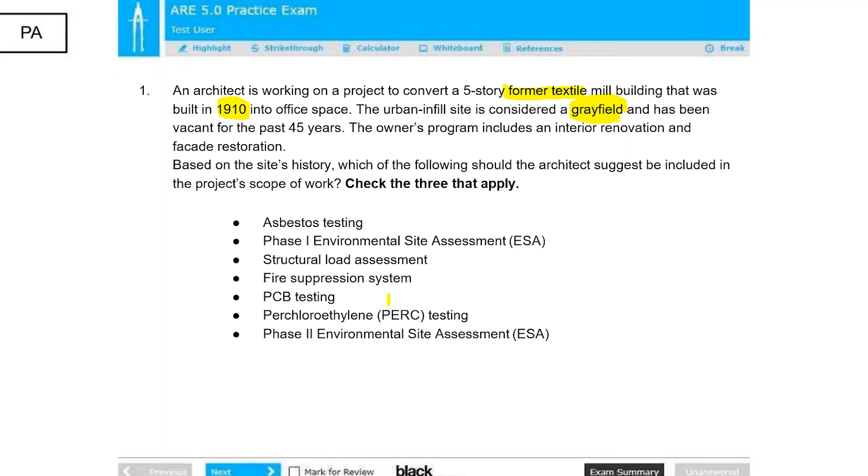So these are the answers that we would expect to have, and I'm going to go through each of them and explain why they are correct, and why the other ones are not. First of all, asbestos testing, that's correct.

That's something that should be recommended. The reason why that is relevant is because of the time frame: 1910. Asbestos has been used in construction for a long time at different levels, but in this case we're talking about 1910. Based on information from the EPA, asbestos-containing elements started to be banned around 1973. So anything before that is a suspect to have asbestos testing. In that respect, that is something that should be recommended.

Then let's go to the next one, phase 1 environmental site assessment. By definition, it's an assessment of the likelihood that a site is contaminated, done through visual observations, historical use reviews, regulations, or records. Given the fact that this is a former textile mill building, there may or may not have been elements that were contaminated, so phase 1 makes sense to first review the history of the site and determine whether there are possible contaminated elements.

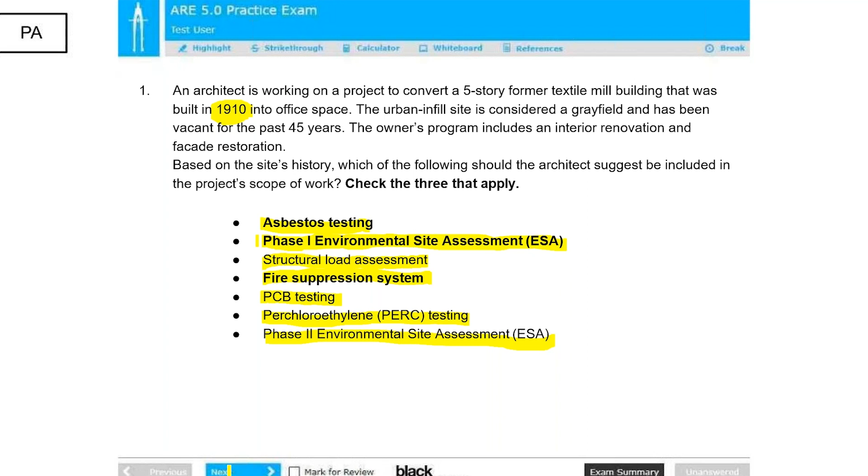Thanks for going through all those, Felipe. It's really important to know all of these terms when you're taking the PA exam. They can definitely come up on a question like this. And I think when people think of the ARE, they often think of questions about a brand new building, new construction, but I thought it was important with this question to remind everyone that questions about renovations show up a lot.

The last thing I'll say about this one is that, in terms of the procedure you go through, one of the reasons PCB testing and PERC testing are incorrect is that, aside from what Felipe said about them probably not being on this particular site, if that testing was going to be required, the phase 1 ESA would note that they think maybe these chemicals exist, and then the phase 2 environmental assessment would go further, do the testing, and confirm whether they exist and in what quantities. So it's important to understand the process that happens at the beginning of a project to figure out all the testing that has to be done.

All right, let's talk about stormwater management.

All right, second question. Again, kind of the same procedure. Think about certain keywords in the question that are relevant. I'm going to highlight them. An architect is working on the subdivision of a large meadowed plot of land that will be divided into multiple residential plots. The architect and civil engineer are working together to determine what kinds of systems should be utilized to mitigate the amount of stormwater runoff from the site onto adjacent sites. So it's purely a site-related question or scenario. There is no talk yet about actual building, so that is important to note here.

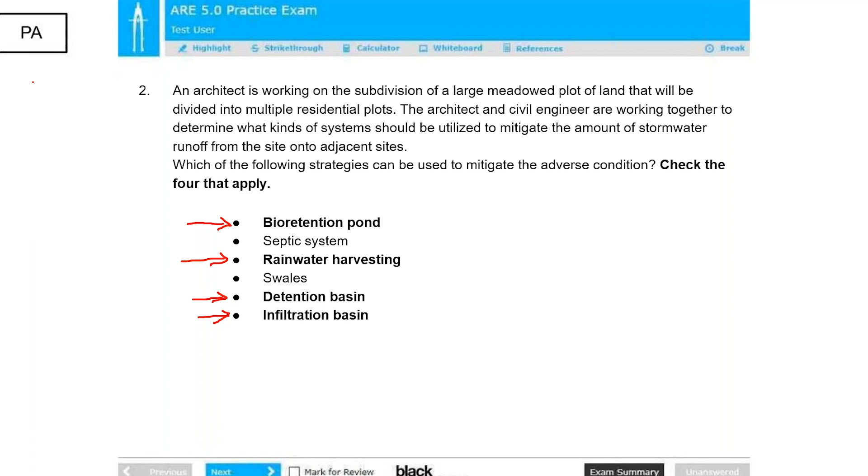So we are going to move on to PPD now and change it up a little bit. PPD questions about sustainability really differ from PA. In PA, we're analyzing what environmental or sustainability issues we need to solve for. In PPD, since we're starting to design the building, we address how, based on our findings in PA, we can address some of those things through design, orientation, and sizing of the systems. So with that, take it away, Felipe.

Okay, question number 3. Let's get our highlighter. An architect is working on the renovation of a 1950s home - always take note of the year where anything is mentioned, it may or may not be relevant - where the client is particularly interested in increasing the energy efficiency of the home. The blower door testing indicated air leakage at a rate of 15 ACH 50. After discussing with the client, the architect and client decide to include air sealing on the facade in the scope of work with the goal of achieving leakage rates at or below 3 ACH 50.

Given the air sealing that will occur, which of the following should the architect also include in the project scope of work? Right out of the gate, what we have to identify and understand is what information they're giving us, and understand what it means.

These terms essentially mean air changes per hour, that's what ACH means, at a rate of 50 pascals. So in this case, we're talking about 15 air changes per hour at 50 pascals versus 3 air changes. A lower number is more efficient because it's having less air exchange, making it more sustainable. So that's the premise, going from a very large number to one 5 times smaller, comparatively speaking.

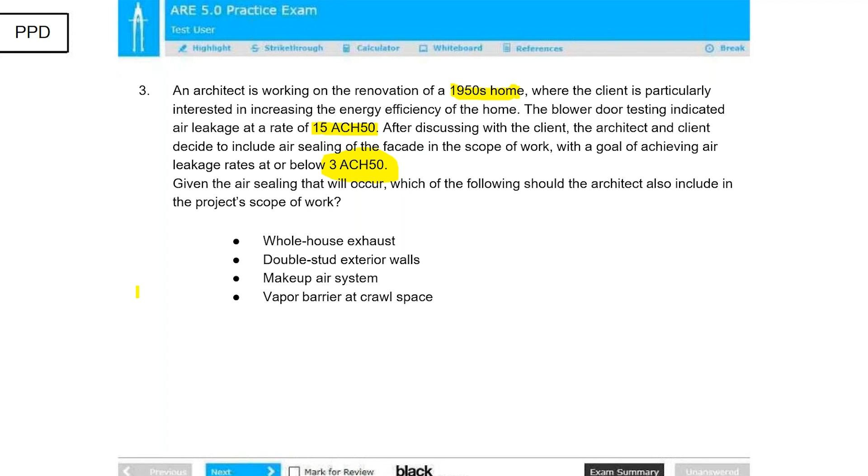So let's reveal the right answer. In this case, what we're looking for is makeup air system. We'll go through all of the answers again. Whole house exhaust is incorrect and would not solve the issue of a low air leakage rate, since we're trying to achieve a low air leakage rate. This is not necessarily going to help in that respect.

A double stud exterior wall, again, may help with the energy efficiency of the house, but not through air leakage necessarily. It may have a better R value, it may have other components, but air leakage is not necessarily one of them.

And makeup air system, that one is correct. We need to include air into the system to account for the lack of air exchange that we're going to have. Conceivably, there's going to be negative pressure in this house if there's no air coming into it. This could turn into issues where the doors may not be able to be opened as easily, or all sorts of interior air pressure issues.

And vapor barrier crawl space, this one is not going to address the issue. So again, at this point, the makeup air system is what should be understood as the answer.

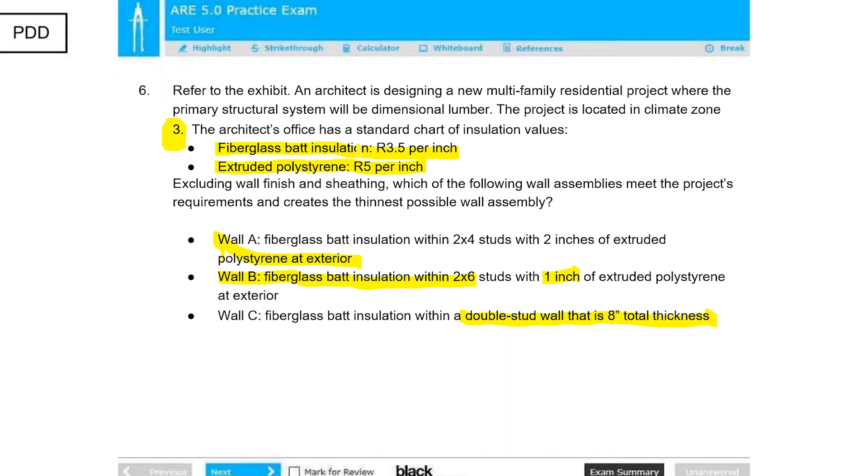All right, so given this, let's review what exhibits are given. Remember, we talked about zone 3, and then it's going to be a wood stud construction.

One of the important key elements is to identify and be able to navigate this chart. First of all, we are here, climate zone 3. We're here in group R, and then we're gonna go all the way down to where it says wood frame and other. These are the target values for this example. By the way, this is taken from the code from ICC, and it's applicable—each jurisdiction will have their own version of a chart like this.

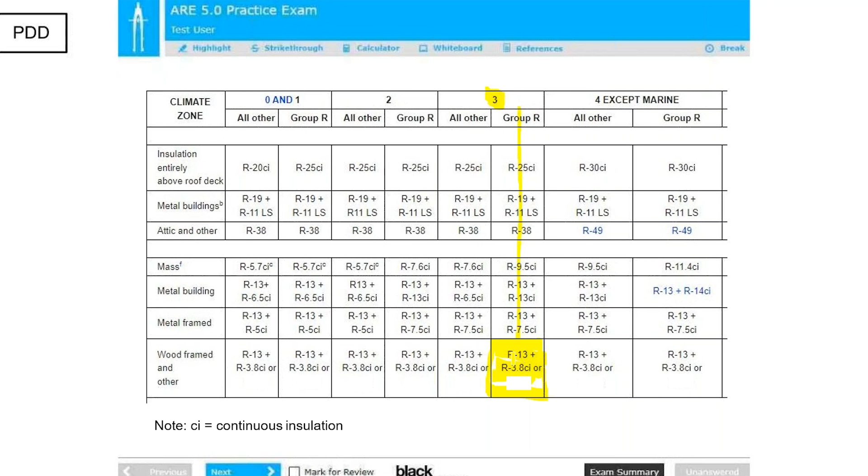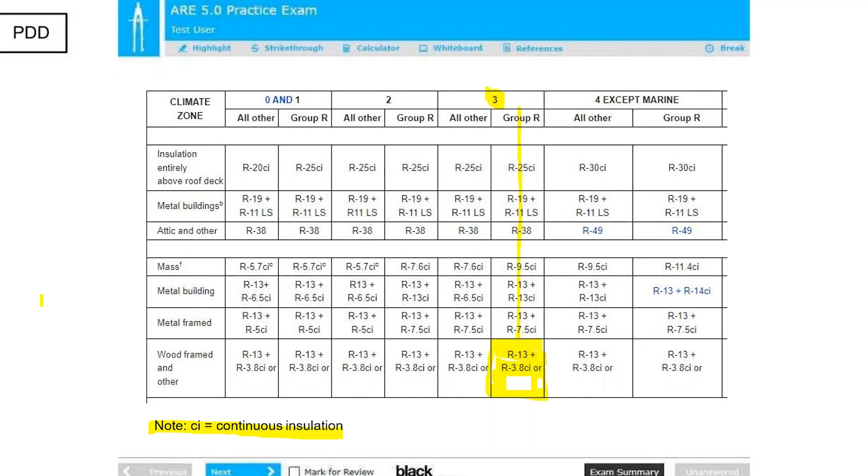So R13 plus R3.8 CI—always important to understand continuous insulation—or alternatively, a wall construction that is R20. So right out of the bat, there are options to achieve this criteria, and it's all based on a prescriptive method. There may be alternative ways to achieve what the code requires, but in this particular case we're talking about a prescriptive method. So let's go and evaluate what it's given.

So we talked about wall A. It's a nominal 2x4, but the actual dimension of the studs is 3.5. That's going to give us the amount of insulation that will fit within the cavity, at a rate of 3.5 per inch, giving us a total of 12.25. Now, if we go back to our requirement, we need R13 plus R3.8 continuous insulation. In this particular case, because this wall does not meet that criteria—this is less than 13—that wall is not acceptable.

Somebody could argue, okay, it's R12.25 plus 2 inches of R5 per inch, which is 10. That's a total of 22, which is larger than R20. However, the math of how these R values are calculated is not one-to-one. The thought process is that when you have a cavity insulation, you're still not insulating 100% of the cavity—there are studs interrupting that insulation, so that has to be accounted for. That's why they give you the option of R13 plus R3.8 continuous insulation, or R20. So that's an important distinction.

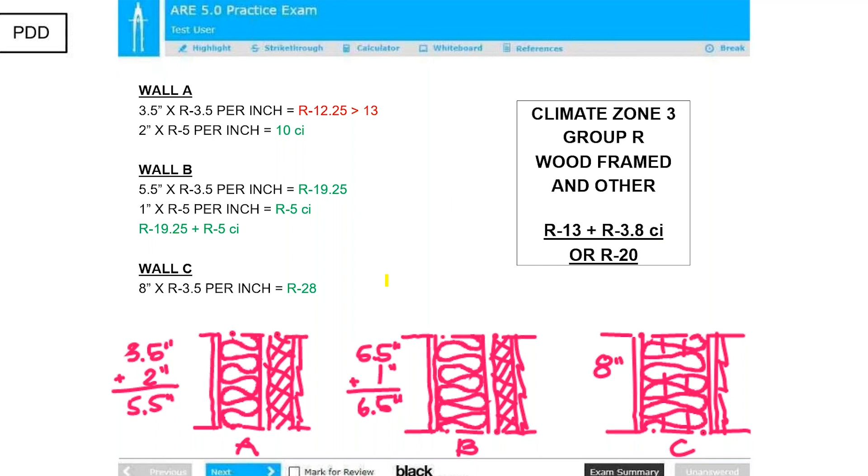And then lastly, wall C: it's 8 inches at R3.5 per inch, so that cavity insulation has that value, giving us an R28. This obviously has a better value than wall B. However, it's 8 inches. So if we go back to what we were looking for—the assembly that meets the project requirements and creates the thinnest possible wall assembly—in this case, the answer is wall B, at 6.5 inches, and it meets the criteria of the chart.

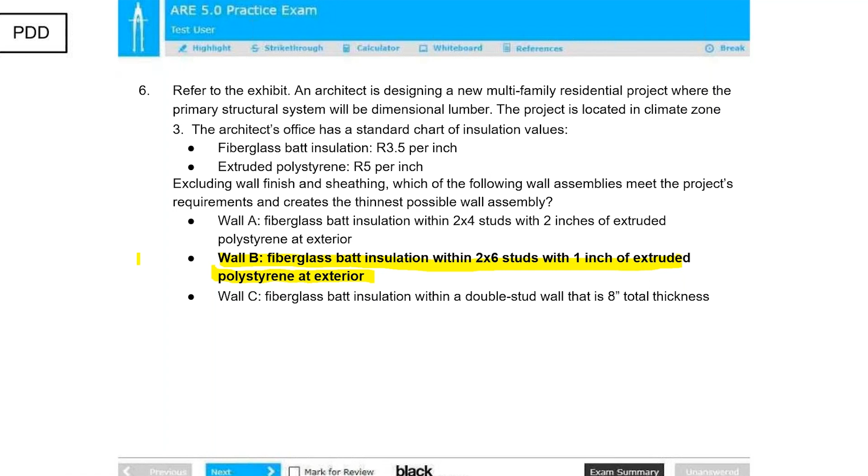Quickly, somebody asked where this chart came from. It's from the International Energy Conservation Code, IECC, and I think it's in Chapter 4, but it's definitely in the IECC, which is referenced by the IBC, so you can find it there.

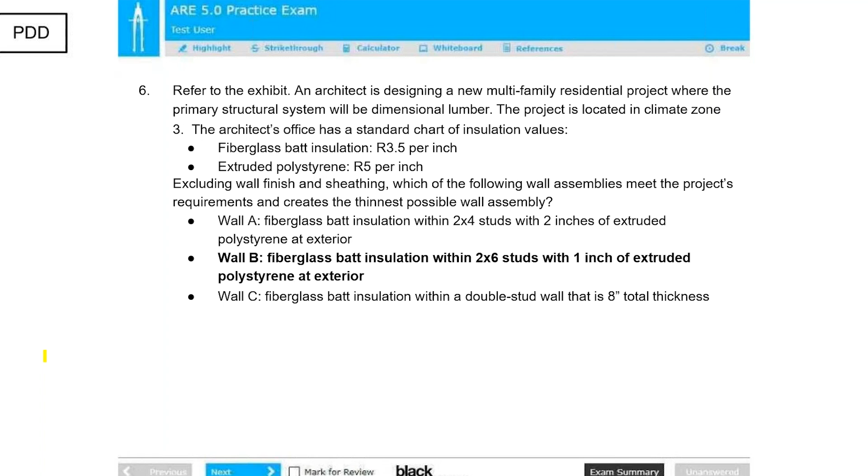Felipe, if you could go back to the question about embodied carbon. Somebody asked, why doesn't the amount of concrete or steel on the project affect the embodied carbon?

Talking about the amount used within the project? Correct, yeah, choice 5. So what we're talking about here is the actual material, the life of the material, not the material and its use or how much material is used in the project. Does that make sense? Here we're specifically asking about the choice of material.

I think the key words in the question are what factors affect an individual material's embodied carbon. The amount used within the project obviously affects how much embodied carbon is in the project. If you have a very large concrete building, it's going to have a lot more embodied carbon than a building that just uses concrete for the foundations. But it's really important to answer the specific question being asked, which for this example is about an individual material's embodied carbon.

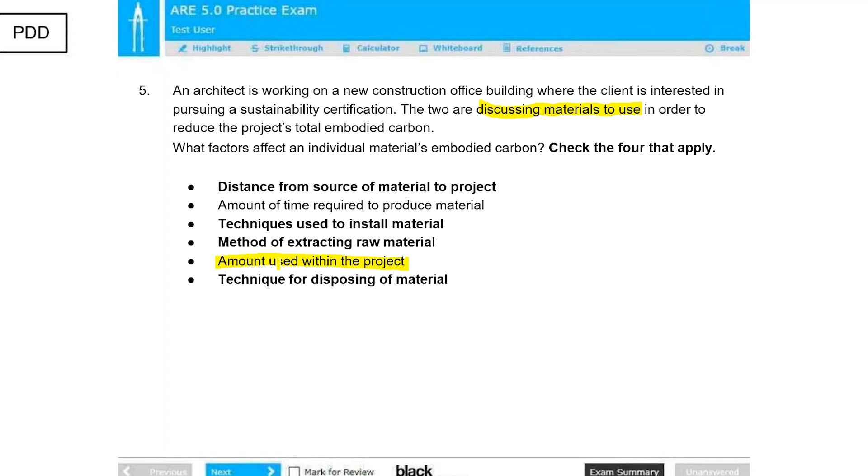We'll go in reverse order here up to question 4. We had one question about when you might need a battery in a photovoltaic system. That's one of the options. Think about it, photovoltaic systems come in many different flavors. One could be one that's not connected at all to the grid. Essentially, you have your PV panel, any energy produced is stored in a battery, and then from the battery that's how you use it. So instead of selling back to the utility, you harvest or save that energy and use it at a different time. That's the difference.

Tesla came out with a system that works like that. They have their own, I wouldn't say PV panels, more like solar shingles or something to that extent. The intent of that system, if my understanding is correct, is for it to be self-sufficient, not connected, off the grid, so to speak. That's when a battery would be relevant. You could definitely add a battery to this type of system if you wanted. But since the question only lets you pick 4 things, there are 4 answer choices that are definitely required based on what you're trying to do: have PV panels, use some of the energy, and sell some back to the grid. You have to pick the 4 that are really necessary and required to answer this specific question.

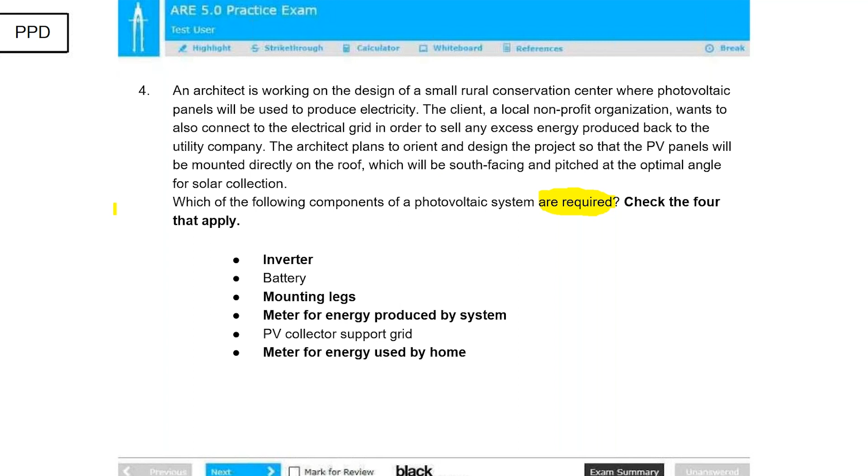One more on this one. Someone's asking, actually two people asked, why do you need the mounting legs and not the support grid? The other question, very similar, noted that the question states PV panels will be mounted directly on the roof, so why do you need legs? What it means by directly on the roof is that there's not going to be a canopy. As I explained, if you have a flat surface, you have to provide additional support for the panels to be oriented at the proper angle. In this case, we're talking about mounting them directly on the roof.

Literally, the literal translation would be directly. However, you do need to attach them, so there's got to be some way to attach them. They're not just going to be laid up there without any kind of support. Mounting legs are a common way of attaching them. Essentially, it's just some item attached to the surface of the roof, to the structure, and then the panel is mounted on that. In this case, the assumption is that the angle is derived from the angle of the roof, which is matching.

The PV collector support grid is one of the other options, a support grid. That's exactly what a system without its own angle derived from the roof needs, right? You have a support grid, you build it up and then tilt it to the right angle. Those support grids, in my experience, are typically used for ground mounted solar where you have a big open field and want to put solar panels there. The ground is relatively flat and you need some sort of support system to tilt them. You could also use those support grids on a flat roof system, since obviously you don't want the PV panels laying flat on a roof. That's not the optimal angle.

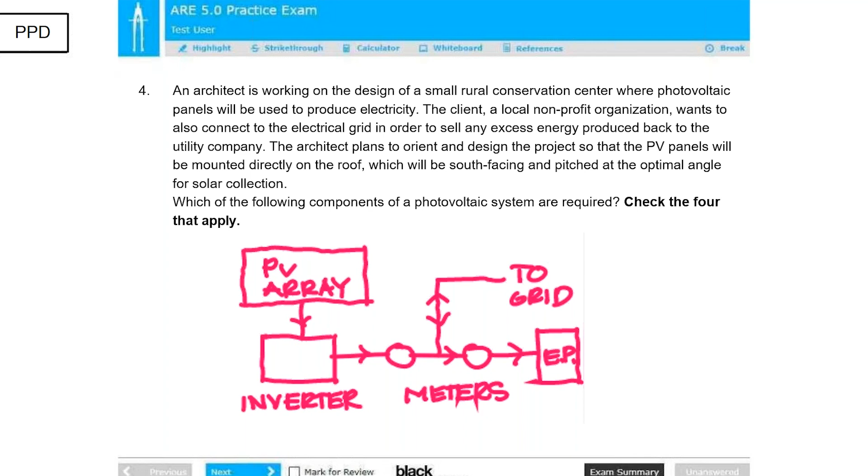Essentially a makeup air system is a fan that is introducing air into the space. For example, in multifamily projects, by code, you have 2 options: you could either provide makeup air by natural ventilation, meaning windows have to open to a certain point or air comes in through the threshold, or you provide a mechanical makeup air system, which is a fan that goes all the way to the roof and pulls air into the unit. I'm giving the multifamily example because that's when it's most commonly used, but the same concept applies to a single home, which is this case. You have to provide some air, essentially a fan introducing air into the system to equalize the pressure.

You could also pre-treat that air if you think about a cold climate. If you're installing this makeup air system and it's 20 degrees outside, without doing anything to that air, you're introducing 20-degree air into the house, which is not ideal and increases the heating load. So what's often done with these makeup air systems is they have a convective coil that pre-treats the air, raising it to a more comfortable temperature. If you want to take that to the extreme, you can harness the heat that would otherwise be expelled up the boiler flue and use it to heat this coil in the makeup air system, getting you relatively close to a net zero home. That's a common net zero strategy.

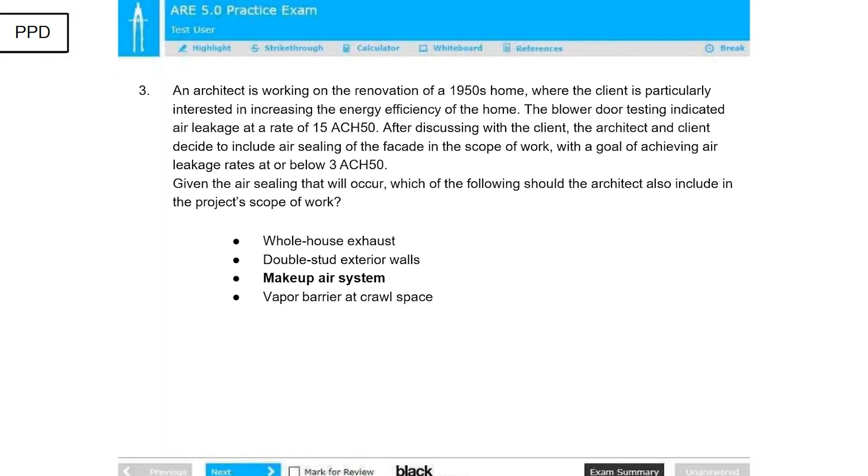Moving up to question 2, we've got a couple of questions wondering why swales are not the correct answer here. One person saying wouldn't they mitigate the amount of water, and another saying they're almost the same as infiltration basins. Why is infiltration basin an answer and swale not?

Swales, think about it in terms of topography - it's the area that is low, the valley. So what it's doing is directing the water to a certain location, but it's not always necessarily having it infiltrate. Its main purpose is really to direct the water to a certain location. While the other options we've discussed are a basin - they allow the water to be absorbed by the soil or whatever green material is being proposed in those cases.

I would say most of these systems would incorporate some sort of swale to get the water from where it is to the system, but the swale itself doesn't necessarily mitigate the problem. If you just have swales with none of these basins or ponds or rainwater harvesting, you'll just be directing that large amount of stormwater somewhere else where it will be a problem. And you certainly can't use a swale to just direct stormwater off the site - that would be adding excess stormwater to your neighbor's property, which you cannot do. So swales are part of many stormwater management systems, but they don't directly mitigate the amount of stormwater going off the site; they just direct it to an area where you want to eventually deal with it.